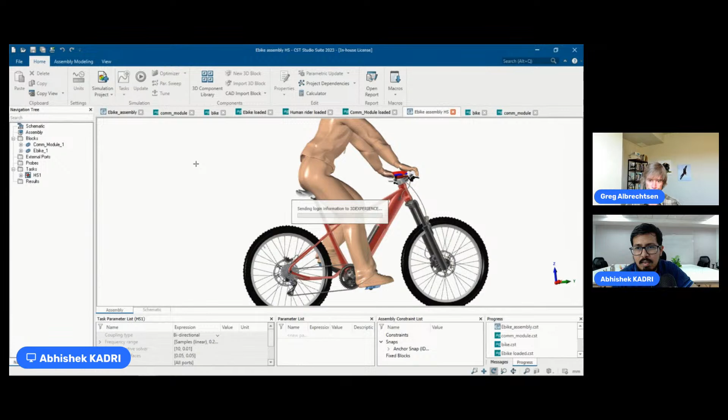Nice. Yeah, when you went to that other screen, it's very familiar. It almost looked like I thought you were switching over to your PowerPoint slide deck or something, but that's just like the layout looked very familiar like that. So that's pretty awesome that they're starting to integrate some visuals of the other tools that we've all been using for years, SolidWorks and Microsoft products, and just kind of bringing it all together and making things very, very familiar to us.

Yeah, and this is everybody, this is a live demo. We only do live demos here. We really try to not do any videos. So he's accessing some server. I don't even know where your server is.

The two of us are in a 12-hour time difference, and when I do demos, I access servers in Europe quite often, and I know you guys access servers over here quite often. So it's all very exciting, that's the beauty of the cloud, right? Anywhere, anytime, any place, for real. You can really be anywhere with a connection to the internet, whether you're hotspotting off your cell phone or whatever. It's just so incredible. Sorry.

Okay, keep going. Even this one is the European server, by the way. So the EMEA demo is actually located in Europe. All this data gets saved over there, centralized, and we all access the data on this particular server. It's not pretty bad actually, we can very quickly download data.

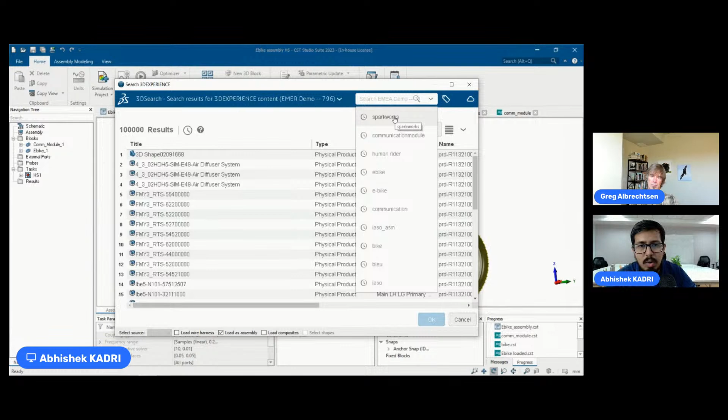So what I'm doing right now is searching for my data. I've entered a keyword called SparkWorks, but I see there are multiple files. I don't know which one of them is mine, because maybe a lot of people are working on the same files. So I go to this button called 6W tags.

W meaning what, where, who, all those kind of things. Here I want to see data that I have uploaded. Within this, I can see the persons, and here's my name, Abhishek. So I'll just click on this, and it will now show me the only file I've uploaded with the same name, SparkWorks e-bike.

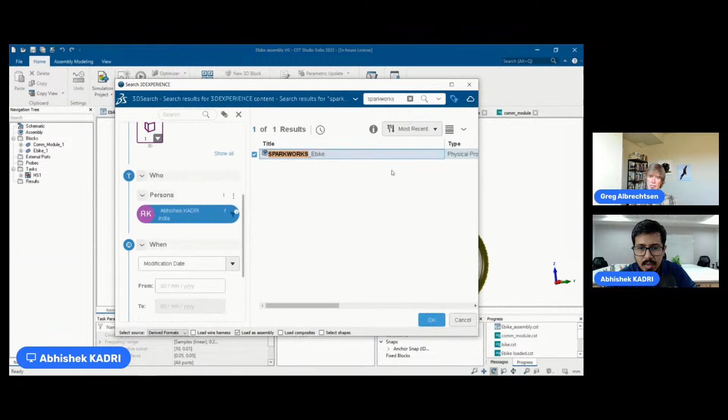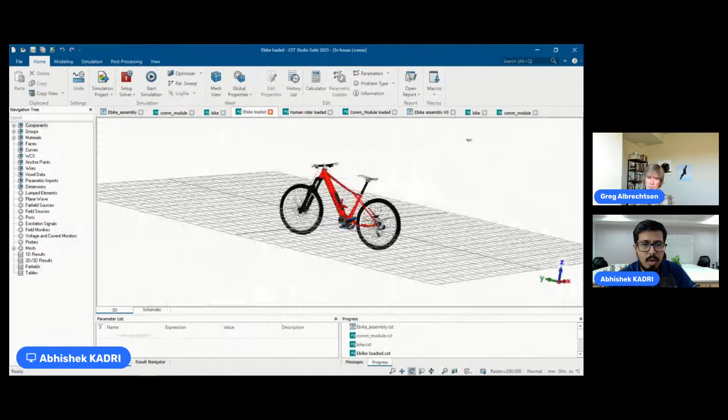So what I do is select this, close this, select it, and say okay. When I say okay, it will start loading the data onto my system. Since I've already done that, I'll just click cancel right now, and I'll show you the bike model that gets loaded. So this is how it looks. You launch it through the 3D experience, and then it would put it in CST here like this.

Exactly, yes, okay cool. Again, like the database, that's the thing that we just get. We're simulation people, but we get all this data management, not for free, but it just comes along with the package, and it's so great. I talked about it in one of my previous sessions, just data management nightmare that I am. So this is great, right?

Yeah, because even a lot of people may be working on the same data, you have the option to lock your file so that people who work on your file cannot actually modify it when you're working on it. You can keep it unlocked so that multiple people can work and then save different versions of the same file. So it's really fantastic.

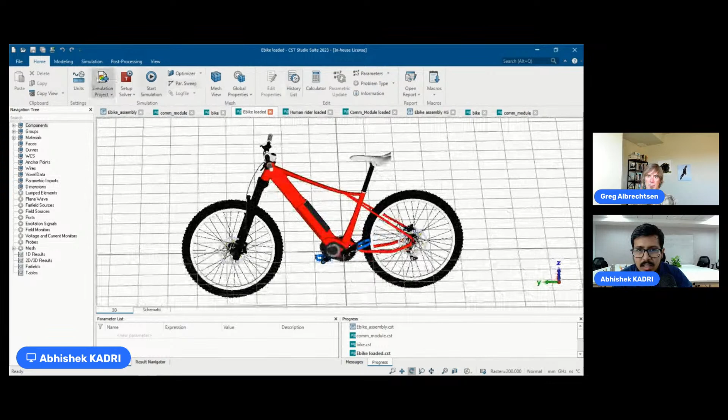So coming to this workflow now, you can see the e-bike loaded over here, and I'll give you a brief overview of how CST looks, what are these options that you see right now. I'm sure you're seeing many of these options, and you're kind of thinking what is really required for us. So I'll quickly show you.

This is called the navigation tree on the left hand side that you can see. This shows us all the different objects that are in the simulation area. So this 3D view that we see, we can call it the simulation area. Out of the first option called components, it is basically all the CAD that exists over here.

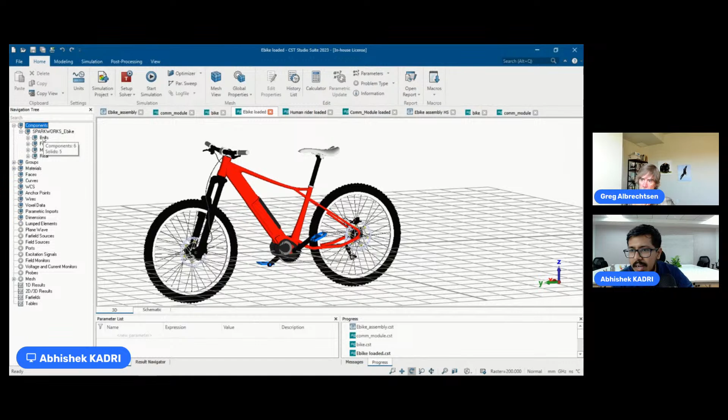So here you can see the SparkWorks bike, e-bike. This is a product, and within that there are multiple sub products, or parts, that come from SolidWorks. When you select each of these parts, only those parts get highlighted, and the remaining goes transparent, so it tells you basically how many parts are there. If I go within these, you will see several parts, like the brake shifter, the brake cable, so many of these things. I think all those who are familiar with the bike model already know this model nicely.

Apart from that, there are other folders like materials, groups. Currently, this e-bike has only materials that came from SolidWorks. These materials are not really of any use to us, because we need materials which have electromagnetic properties. Basically, a thing that is a metal needs to be defined as a metal in CST. But before doing that, let us first load all the different CAD that we want to work on.

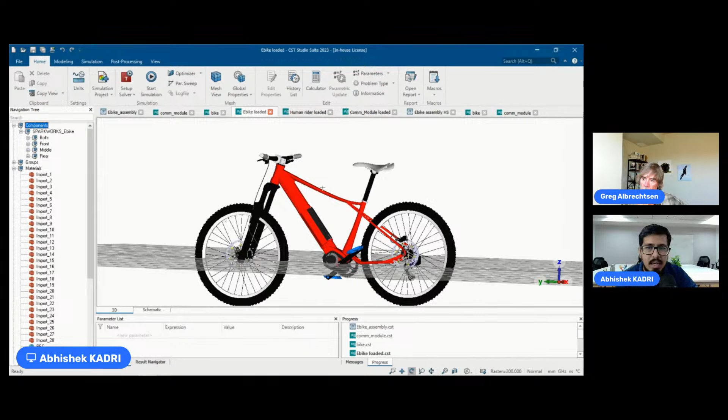So this is just the e-bike, but we need other things also. For example, since this entire demonstration is about antenna placement, we also need an antenna module that will get fixed on this e-bike, and we also need a human model. So let's go back to the same 3D experience logo, and again let's search for the human rider that will go on top of this bike.

Can you store those characteristics in the 3D Experience material property? Yes, you can. There is a way to store that. There is a material library in the 3D Experience platform where you can save all the properties that get defined in CST.

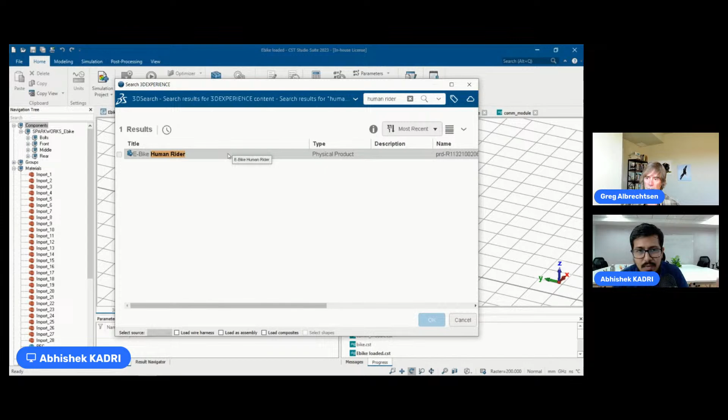So for this model, it actually came directly from SolidWorks. So we did not really go to the platform and define those material properties. We could have done that, but nevertheless we can do that in CST also.

So this is the human rider that I was talking to you about. It shows me only one file with the same name. Again, I click OK, and then it loads the human rider. I've already done that, so I'll just show you how it looks. This is how the human rider looks.

That looks like it's dancing or something. Sorry, that looks like it's dancing. I'm not sure if that's the rider or what.

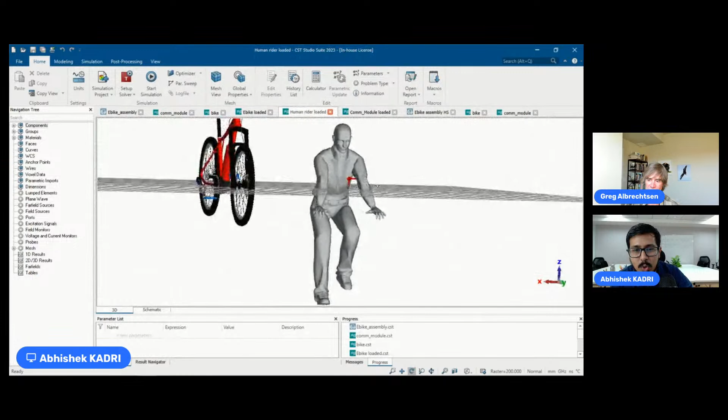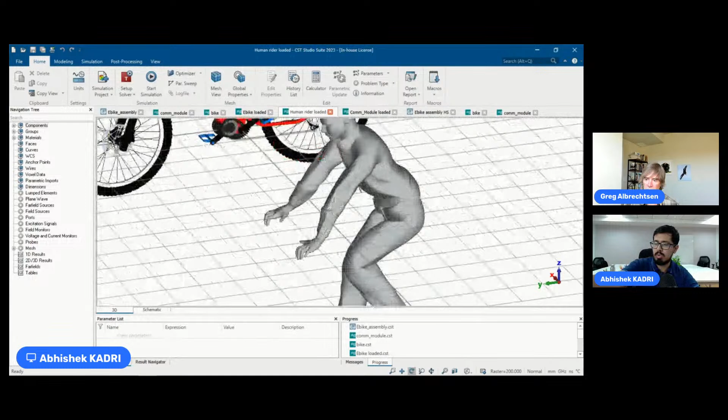Yeah, so that's actually we used a platform tool called Human Design, and that gives us a variety of human models, and you can actually pose it in the way you want to. For this demonstration, I have not actually covered those steps, but it's really a fantastic tool. You can pose it in any way. There are constraints, like your elbow would move only up to a particular angle, it won't go the other way around. So all those constraints are already fixed in that app. It's a wonderful tool.

Using this tool, I was able to pose this model and then download it. But as you can see, it's not placed on the bike. We want it to be exactly sitting on the bike. So very easily we can translate this model to the place where we want. I already have the XYZ coordinates of this human model.

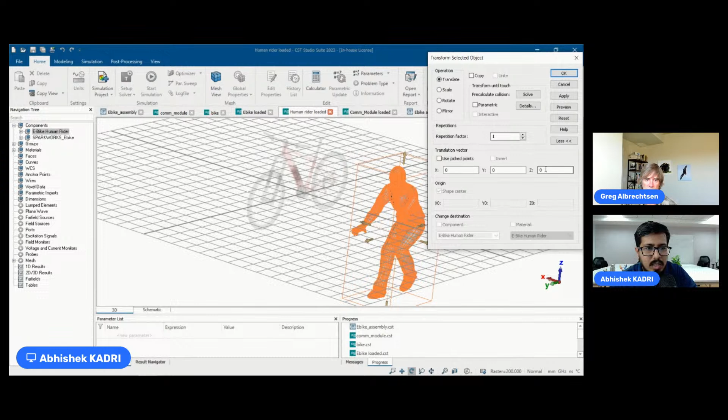So if I go to the navigation tree, I select the e-bike human rider, right click and click on transform. Transform will give me a variety of options whether I want to translate, scale, rotate, or mirror. Right now I just want to translate it, so I'll enter the XYZ coordinates over here. I can also just drag it this way, which does the job easily but won't be accurate. If I want it to be placed exactly on the seat, I need to enter those values. So I'll just quickly enter them.

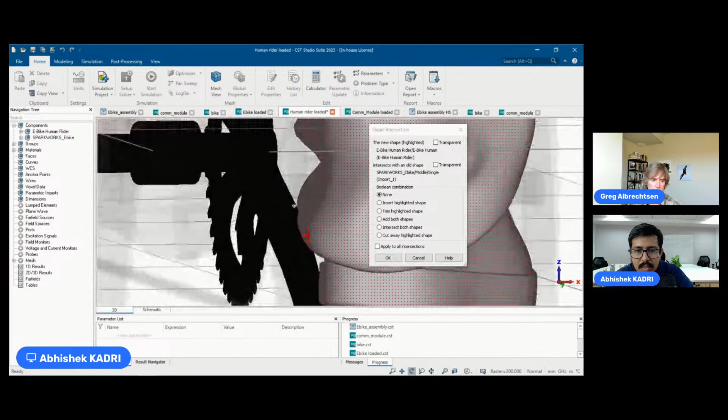So the cloth, that is the pant, is a little bit interfering with this part. I'm not sure what it's called. It's some part of the bike, but this is where the chain goes, right? This is where the chain goes of the bike.

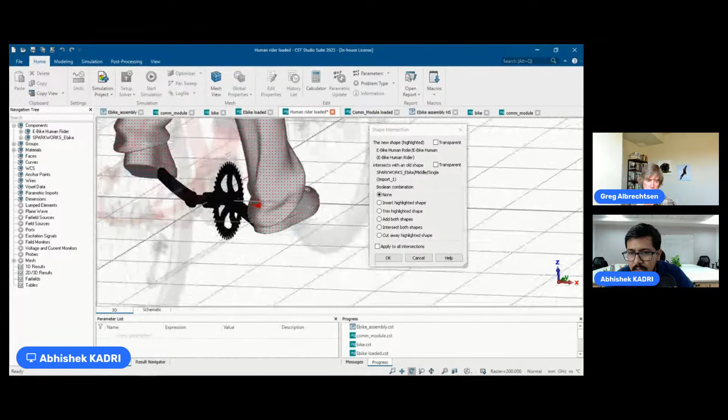Yeah. Since from the EMAG point of view, it doesn't matter. Even if there is a slight intersection, it doesn't matter. Maybe for structures or fluids workflows, it may matter. But from an EMAG point of view, it really doesn't matter because this one object is metal, the other object is basically human tissue. A slight intersection will do.

So what I'll do is I'll just select apply to all intersections and I'll say none. So nothing will happen. If I say something else like insert the highlighted shape or trim the highlighted shape, then accordingly that CAD will get modified. Since I don't want that, I'll just say none and OK. And now you can see the human placed exactly where it is supposed to be.

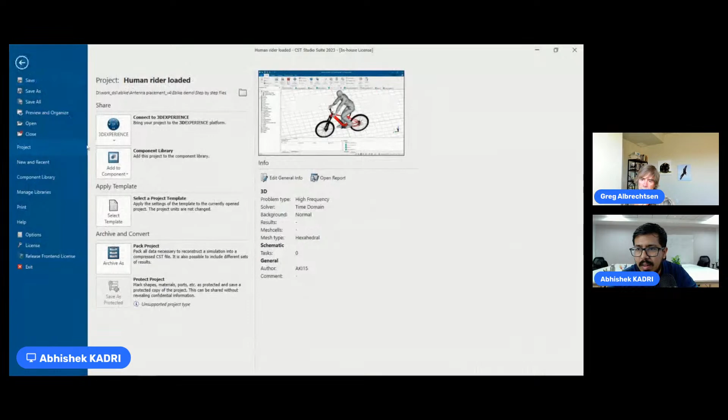So we have one part of CAD, that is 50% of our CAD definition, done. The other 50% is the communication model, the antenna module. So what I now do is create a new file. I go here, new and recent, and I click under 3D simulation on high frequency because we are all working on high frequency simulation, by the way. There's low frequency, there's high frequency in EMAG.

How do you define what is high and what is low? Yeah, that's my question. Thanks. Okay. I thought you would ask that. So high frequency is basically anything in terms of hundreds of megahertz. I'm sure you know this unit called hertz, right? Number of cycles per second. And megahertz is 10 raised to 6 hertz. So for example, most of our radios are like 98.7 megahertz, almost in the range of hundreds of megahertz.

Your GPS antenna works at 1500 megahertz. So it's definitely high frequency. Anything that is low frequency would be in the range of kilohertz, so just 10 raised to 3 hertz. Most applications like motors or some sensors which don't have anything to do with data transfer, but just electrical stuff, that will be low frequency stuff.

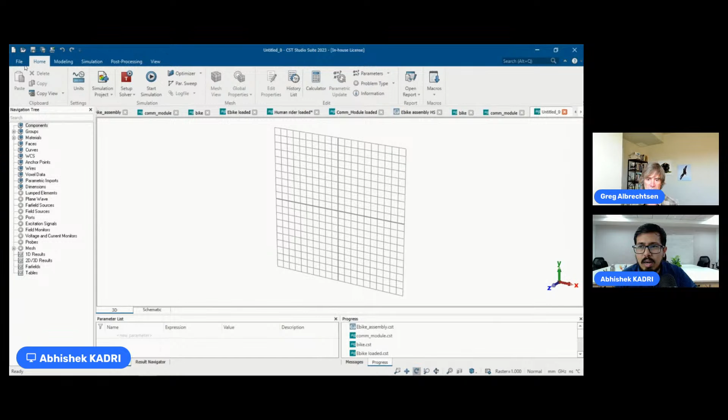So I now created a new high frequency simulation file. And what I do here is again, I go to the 3D Experience logo and I load another model, that is the communication module. This is again a file that comes from SolidWorks. Just like the bike, we had saved another file called the communication module, completely developed in SolidWorks, and that was saved to the platform.

So now I'm just looking for this file. I'm searching for the file on the platform. This sometimes takes a minute to load.

So while that's loading, we have a question from the audience. I know for structures, we have some examples that are accessible. What about the EMAG stuff? Obviously we're supplying the bike models, but does the software come with any tutorials or examples? Yeah. There are many courses on the EduSpace, the official tutorial site, where you can opt for these courses, and it gives you a very hands-on experience where you can download models, execute the simulations, and then verify your results with the results mentioned in the tutorials.

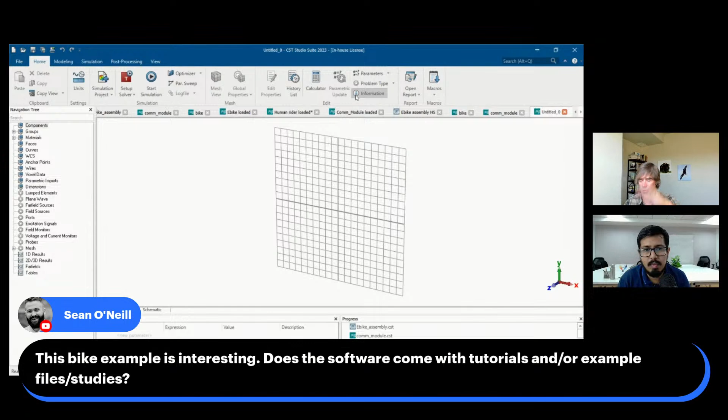Okay. Because I know SolidWorks comes with help and all sorts of awesome examples. Is that a similar setup then? Yes, definitely. From an EMAG point of view, there are several modules in CST. This is just the high frequency module that we are going through right now. There are multiple modules, even low frequency. There are sub modules, EMI, EMC. Each module has a curated list of examples. You can go through those examples, and at the end of the day, you'll be pretty confident working on EMAG workflows. Nice. I can guarantee that.

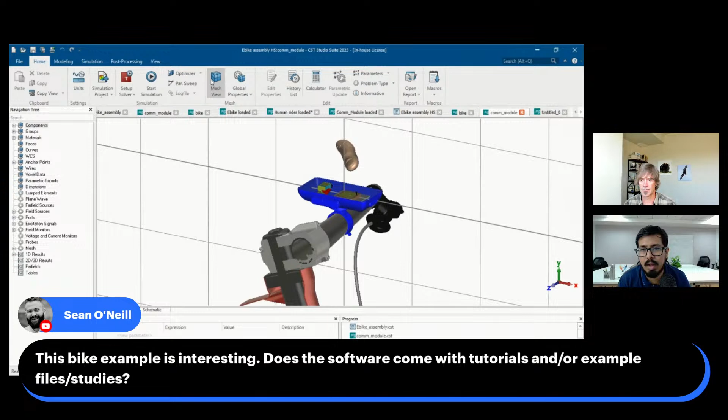So this is how the communication module looks. I was trying to load it from the platform, but I think I need to reload CST. But luckily, I have loaded the communication module already in CST.

This is how it looks. I've hidden the top screen. This is basically one of those devices which have the display as well as the antennas. It's like a phone basically that goes on your handlebar. And what you can see over here is there are two antennas within it.

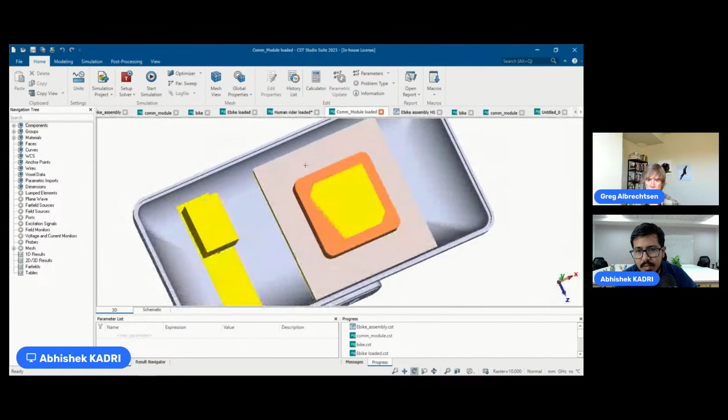So this antenna that you can see, the bigger one, is the GPS antenna. This is the main antenna. And the second one over here is the Bluetooth antenna. So this device basically has two antennas. So what we do now is that we have all of our CAD already imported from SolidWorks into CST. The next step is material definition.

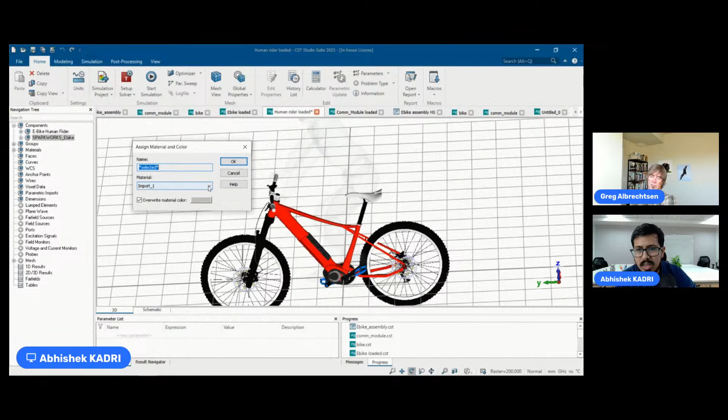So let's first go to the e-bike with the human, and I'll quickly show you how to define materials. I right click on this e-bike over here in the navigation tree, and I say assign material and color. And since we know that the bike is mostly metal, mostly steel, I'll say load from material library. This will show me the list of materials that are already in CST.

They are inbuilt. There's a huge list of materials like air, aluminum, all kinds of materials, fully defined, even the thermal properties, the EM properties are completely defined. And that comes with CST? Sorry? That comes with CST? Yes, that comes with CST, and there is an additional module with an extensive list of more materials. You can also download that from the DS website.

So yes, this is the material that we need. It's called steel. I'll just load this material and then I'll say overwrite material color, and I say okay. What this does is that it does not take the color of the material steel, but keeps its original color. If I had not checked that box, everything would turn fully gray, which is very bad for visualization. So right now the entire bike has become steel.

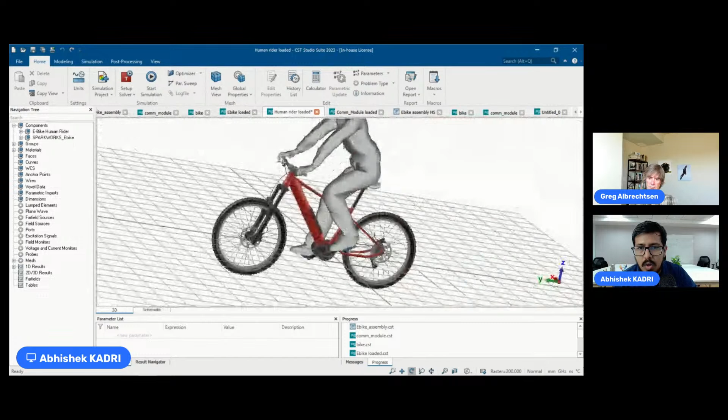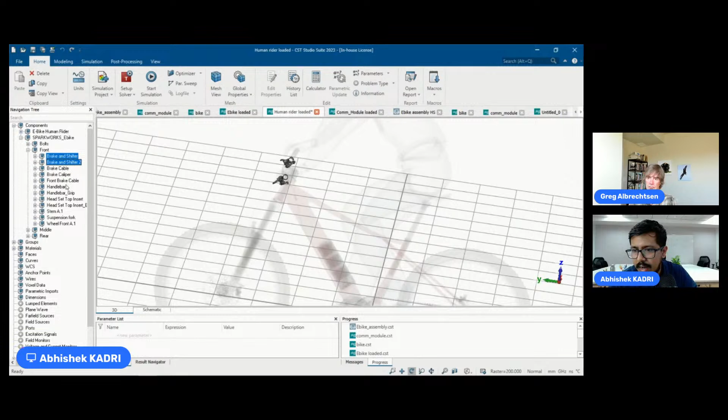But we all know that there are some parts that are not steel. For example, the tires, the brake handles, the grip of the handlebar. So what we can do is go to the navigation tree, look for those parts, and right click on them. We can select by keeping control pressed. It will keep highlighting those parts, and then we right click and assign material. Just a second, I'll also select the tires.

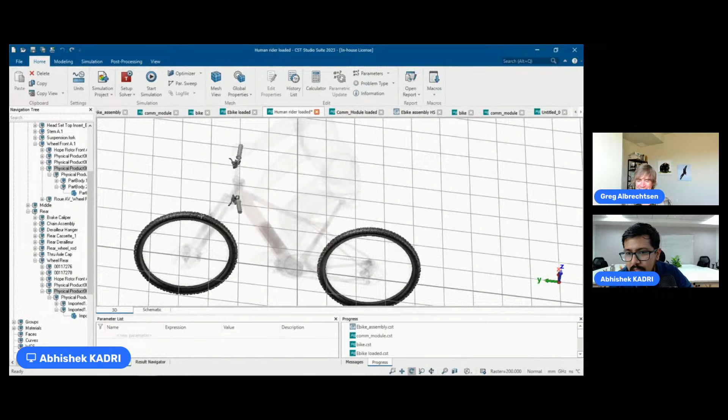I think there's some other software that could use this sort of selection visualization. That's awesome. Things like wireframe outlines. That's great. I love it. Yeah, right now I was not able to recollect which subfolder those parts are in. So I just clicked on it, and it showed me where exactly it is. That's awesome.

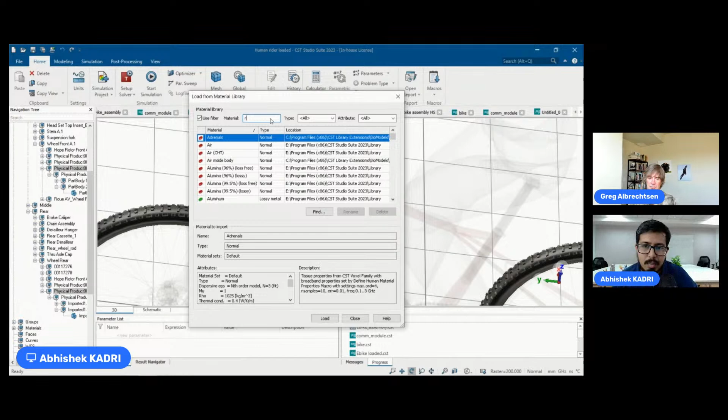So I just selected over here, assign material, and again I go back to the list, and this time I look for a different material, which is rubber. We can go in a lot of detail in this, but for this demonstration, I'm just selecting two materials, steel and rubber. Cool. So I search for it, I see rubber over here. I load the material and I say okay. So this material also has been defined now.

Similarly, for the human being we have a separate material. It's called muscle tissue fat average. But before that, this model actually has a lot of parts. When I clicked on this module, as you can see, there are multiple parts here. Whenever I move my cursor, it highlights the selected part in red without even clicking. Whoa. And what I came to know is that it's not really required that so many parts be there.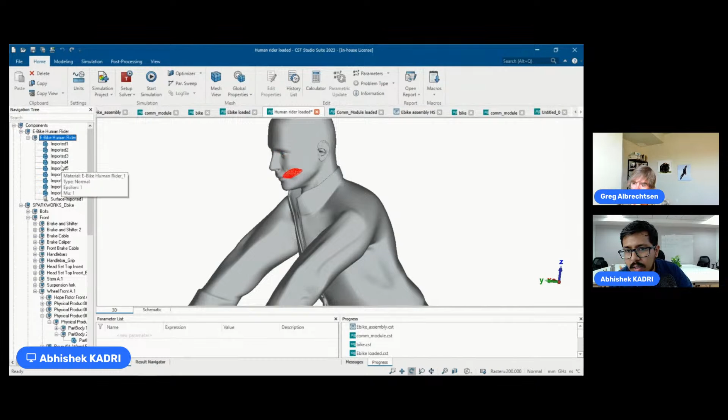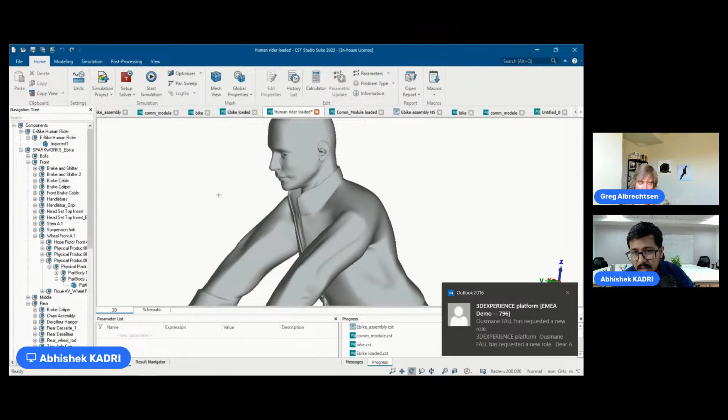This is like the eyeball, the jaws, the tongue. I don't really want that much detail. So I'll just keep the base module of the human being and select and delete the remaining things. So those are probably in there for somebody doing a cell phone or a Bluetooth headset, I guess, right? Yeah, if you want detailed analysis of how it affects the teeth, how it affects the eyes, you can see that too. So that's a very good feature.

So again, I just assign the material. I go back to the material library and I search for my material.

That's muscle. You'll see all kinds of materials over here. You'll see blood, you will see tissue, everything. But right now, since everything is just one model, I'll just take a muscle fat average, and I want the color of that material. So now, see, the material has been defined. So we are done for the e-bike.

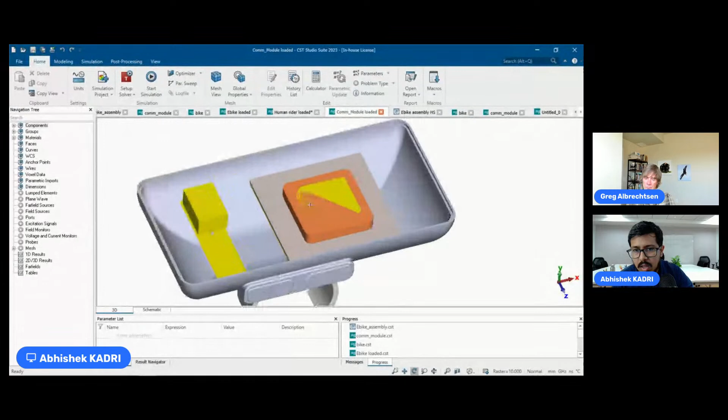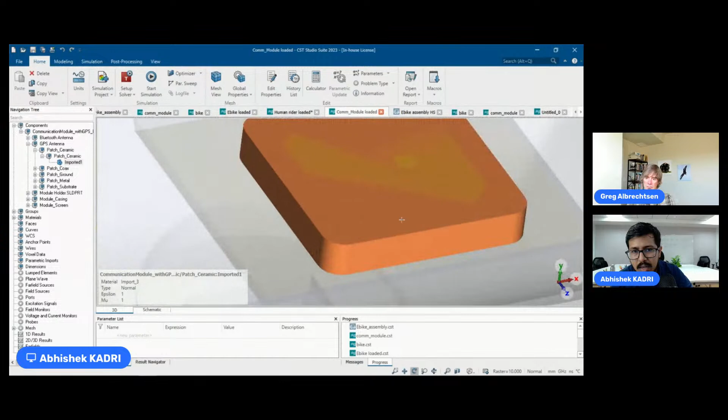Similarly, we can also define materials for the communication module. As you know, some parts of an antenna are metallic, whereas some parts are dielectric. So we need to define exactly which parts are what. For example, I'll not show all the materials, but I'll show you just one of these things. So for example, this is called the dielectric. It's like an insulation on which there is a patch.

So the patch does the job of radiating electromagnetic waves out of it, but it needs to be placed on something that is an insulation, and below that you'll see another metallic object called the ground plane. So, as you know, like basic electrics, there need to be two potentials, plus and minus. Similarly, we have the radiating element and the ground plane. So between these two things, we have the electric field that gets converted into an electromagnetic field and it starts radiating.

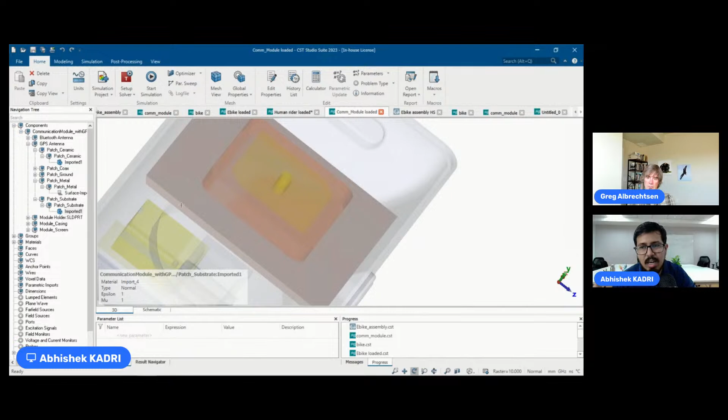So again, we assign a material. This time, my material is not in the library. So what I can do is I can just create a new material and I can give it my own name, just as I want to. So I call it ceramic, and the electromagnetic feature over here is called epsilon. Epsilon is basically relative permittivity. This is something that defines how your electric field will be stored within that material.

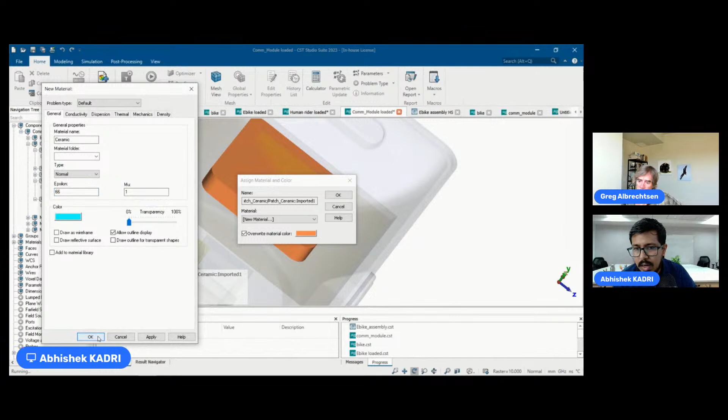Yeah. So I know that for ceramic, the epsilon value is 66. I got it from a data sheet. Okay, so I just click OK, and this material gets defined. Likewise, I can even define other materials. And once I'm done, I can even change the color if I want to.

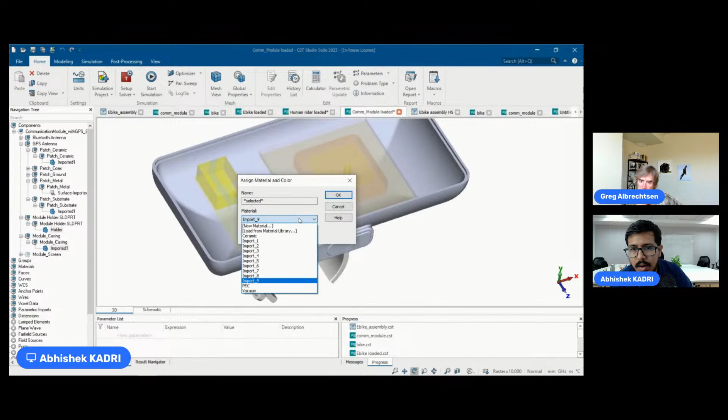If I think that this is a very dull color, gray, I can go here and select blue, and maybe I can call this material plastic, and the epsilon value for plastic is 1.2. So I define this, and this becomes blue. So that's how easy it is to change the material, the electromagnetic properties, as well as the visualization colors in CST.

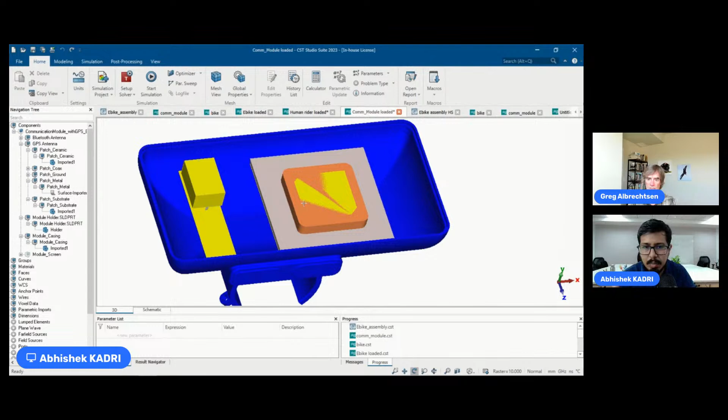Once we have defined all the materials, the next step is port definition. So we wish to create an area within this antenna where the excitation will be occurring. So basically, if it was a physical antenna, where do you connect the wires to the antenna so that it gets charged up and it starts radiating? For that, there is a tab called simulation tab. When you click on it, you will see an option called a discrete port, a waveguide port. There are different kinds of ports. So what we'll do is we'll create a discrete port.

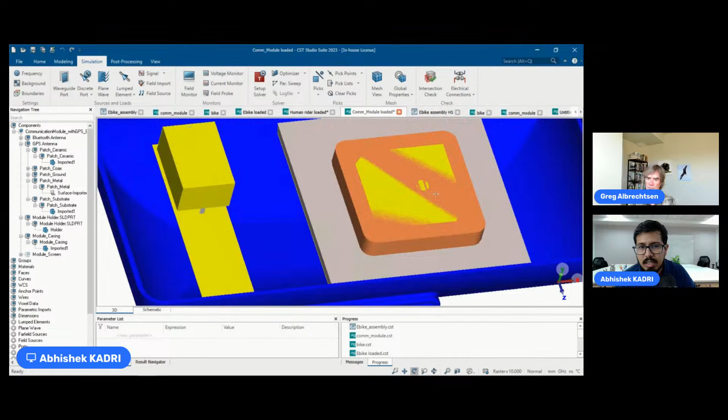So for the object where the port gets created, if I look in this tree, I need to look for the coax. Coax is the coaxial connector. That is where we want to define it. So it looks something like this. Generally, it has multiple conductors and a dielectric in between, but this is a simplified version of the coax. So what we do is we select the edge. For that, I'll hit E. It gives me an option to select the edge.

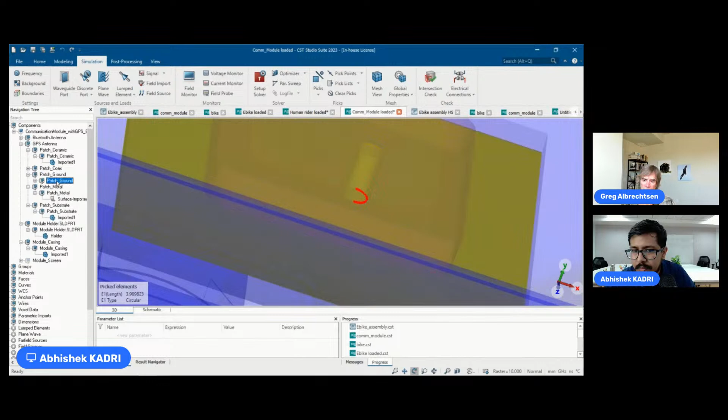Okay, and then I can select the ground plane. So if I go to ground, this is the ground plane, and I select, let's say, F, and I click on discrete port. So I'm basically selecting two areas where the discrete port will be created between those areas. So this is how the port looks.

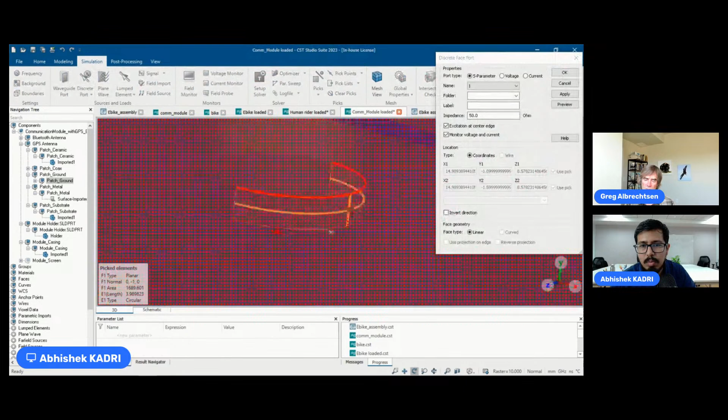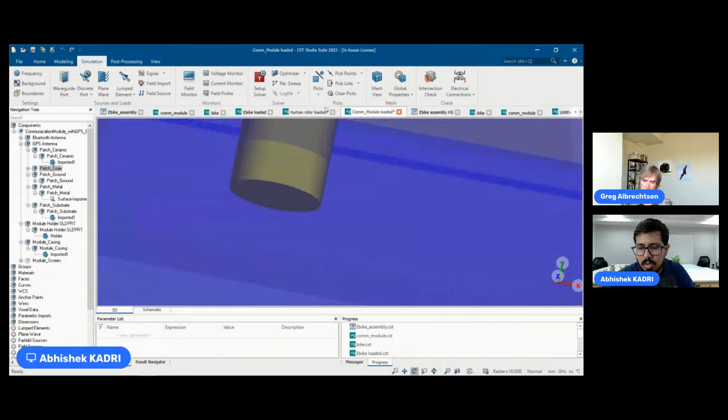Now, ideally, I would want the port to be completely circular around it, because the electric field will obviously be flowing through the entire port, not just through half of the conductor. Right. But since SolidWorks, while importing the data, divided this cylinder into two parts, that is the reason when I select the edge, it selected only half of the edge. So either I could fuse those two halves in SolidWorks, or I could simply select the coax once again and create another cylinder over here.

So if I say modeling, pick circle center, I select the center, and then I create a cylinder over here. So there are modeling capabilities in CST also. You don't need to go back to SolidWorks for very, very small things. You can do those things in CST also. That's good to know.

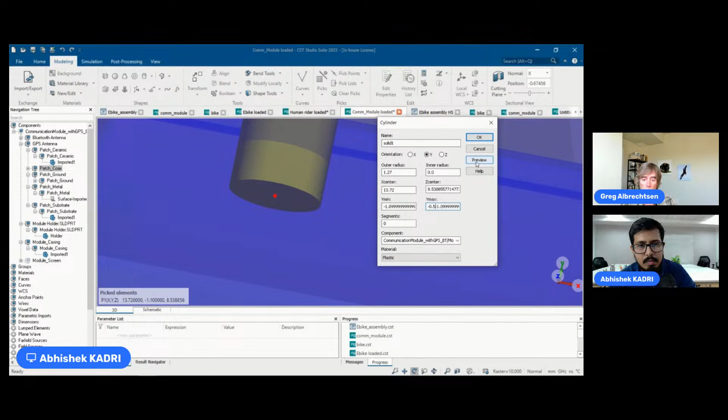I know this is not SolidWorks, obviously, this is CST. It may have originally been one surface in SolidWorks. So sometimes when you move to even 3DEXPERIENCE or this, you have to have some way to make that back into one, because it just automatically splits it in the translation.

So that's cool to see that you have this capability. I've been asking too many questions, so I've really kind of pinned back my questions. We have about 10 minutes or so left, so we'll keep running through here.

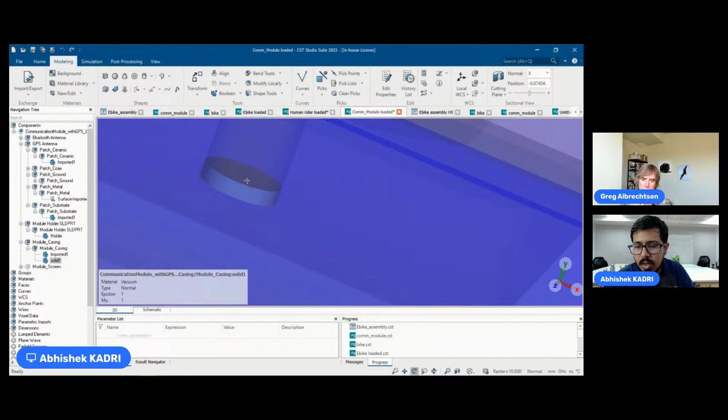Okay, Abhishek, let's go. Yeah. So now that I've created this cylinder, I can select the two faces of this and the two edges of this, one top edge, one bottom edge. So now I have two complete edges. And now I click on discrete port, and the entire port, as you can see, is throughout the circumference. This is what I was trying to achieve.

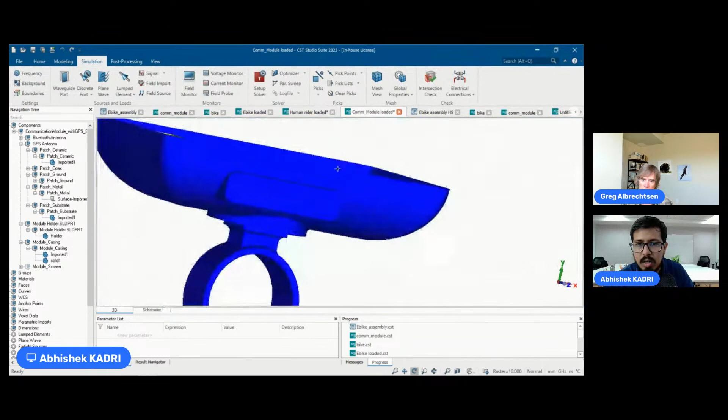Cool. So now that I've created the port, similarly we can create another port, but I've already done that. So I'll quickly show you the next step, that is creating the assembly project. We have created these two CST files. One is the e-bike with the human. The second one is the communication module. And now the next step is to place this on the e-bike. So we need to create those points where it's going to be placed.

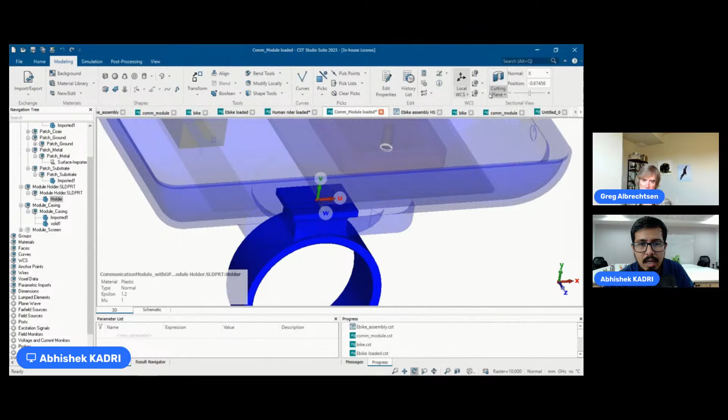So I select this particular point and I create an anchor point. When I click on this particular option, I say align WCS. The WCS is basically the working coordinate system. And I say store it as an anchor point. The same thing I do even over here.

I can either select a point over here where I want the communication module to be placed, or I can even use the XYZ coordinates and directly define the coordinates through that option. So I need to pick points from coordinates, and here I define those points, and then I do the same thing. I create an anchor point. So both of these files have the anchor points.

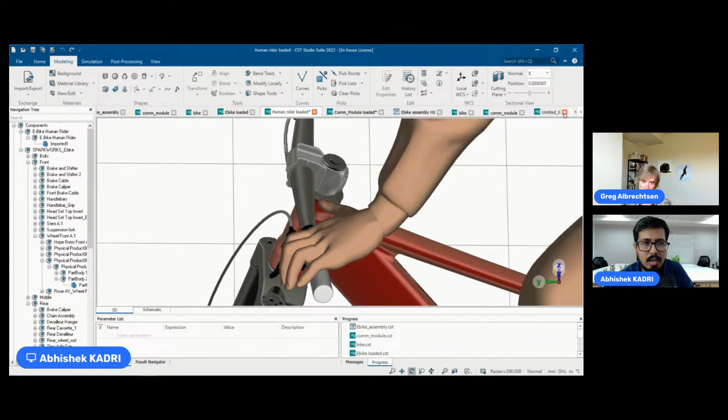Then what we do is that we create a new file. We go to new, and this time we say an assembly project. So we want to assemble two different blocks together. So now we select those blocks. So here you say import 3D block. Both of these files are now locally saved. Even though we got it from the platform, we did save it locally.

So let's see those files. The first one is the e-bike with the human. So I click open, and that gets loaded in this new project. And the next block that I import is the communication module. So this also gets loaded over here. You can see this yellowish black spot. That's basically the anchor point that we just created. These are the areas where we want the two blocks to get connected.

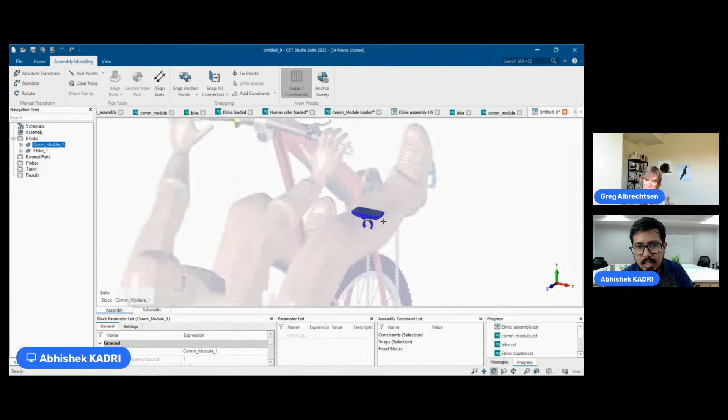So I go to assembly modeling, I select the communication module, and I see it's somewhere completely different. I say snap anchor points so that I can connect these anchor points. So I select this one, and then I select this one, and the module quickly just snaps back over here.

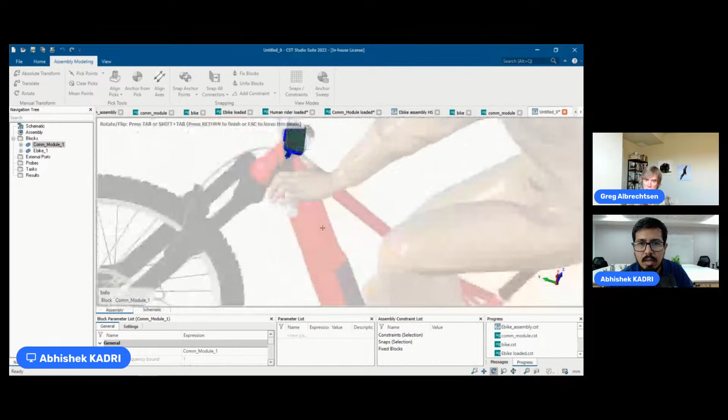And now I can change the orientation by just clicking tab. It will keep on rotating. And yeah, this is the orientation that I want. So I click enter. So now this gets fixed over here. So we have the antenna placed on the e-bike. The next step is to define the simulation.

I could define everything in just one simulation. I don't need to create a separate block for the e-bike and a separate block for the communication module. But what would happen is that the mesh size would be extremely large, like in billions of mesh cells, because 1.5 gigahertz is a very high frequency. So solving billions of mesh cells will take a long time. But if you have GPUs, then you can even solve them within a day or two. But we want to solve this very quickly.

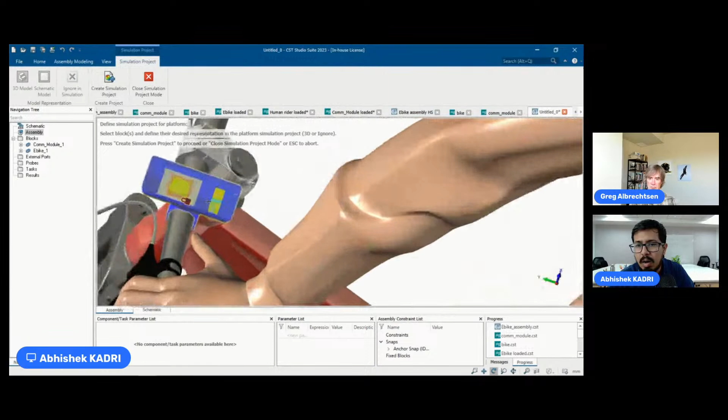What we did is that we created two different blocks, and now we create a simulation project called the hybrid solver task. What this does is that it solves very finely only the communication module. It records the waves that come out of it, and it only takes those waves and excites the entire e-bike, as opposed to solving the entire e-bike. It is only solving the small portion.

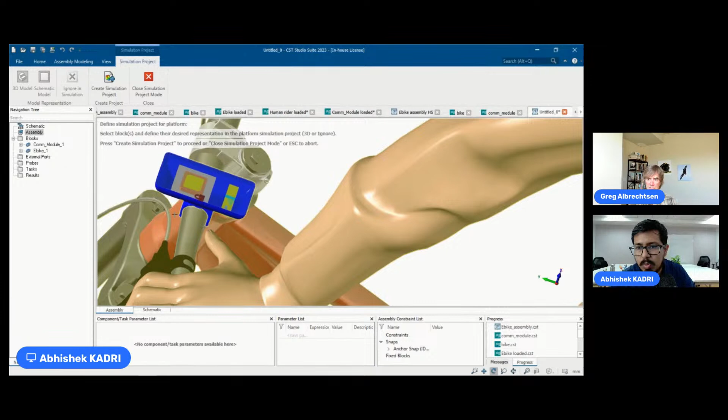So I'll show you how that looks. It's now asking me to define the simulation project for platform. So platform is basically the larger structure that we want to select.

So it's the e-bike. We select the e-bike, we click 3D model, and say create simulation project. Here we define the solver. We have a list of solvers we can select: integral, transient, frequency domain, TLM (transmission line matrix), and asymptotic. Asymptotic is the fastest solver because it uses the shooting and bouncing technique of simulation. We select this and click OK.

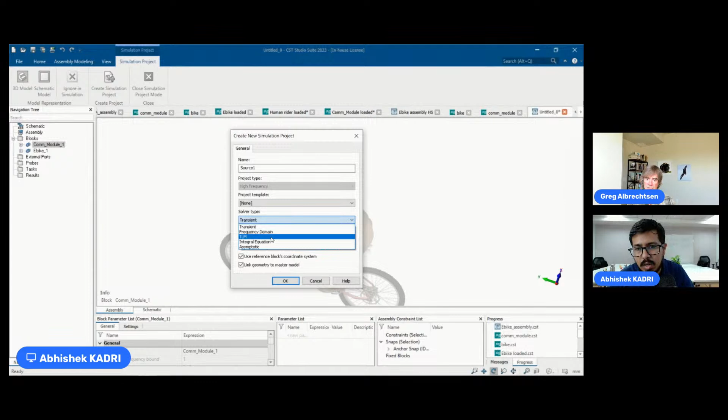Now it asks us to select the source. So I select the source. Again, I click on 3D model because I want an actual model. Then I click on create simulation project and select the solver. This time I select the TLM solver. TLM solver is a very good solver that very finely solves your simulation. It uses basically Maxwell's equations. All of these EMAG tools use Maxwell's equations to actually solve at each of those points.

So we select that, and once we have defined the source and the platform, it still asks us, do you have another source? In our case, we have only one source, that is the communication module. So we then click OK.

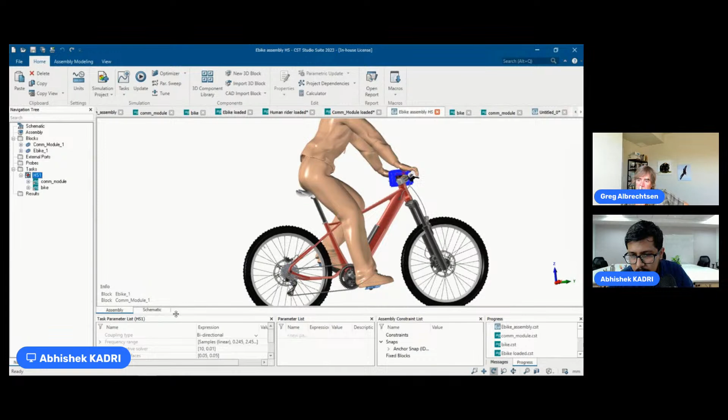As soon as we do that, we see this hybrid solver task get created. When we click on this, it shows us the task parameter list, and it asks us things like what are the different frequency points or frequency samples. Since we have only two antennas, the GPS antenna and the Bluetooth antenna, we enter only those particular values. I enter the frequency for GPS, that's 1.575 gigahertz, whereas for the Bluetooth antenna it's 2.45 gigahertz, the standard band in which all Bluetooths transmit and receive. The number of frequency samples is only two, so I want to see only the fields at these two frequencies.

Once I'm done with that, this is a bi-directional solver. What it does is excite this particular box that you see here. The smaller box gets excited and it records the field due to this box. Then it goes to the e-bike simulation model. It excites the entire field with those particular fields recorded from the small box. Then whatever reflections come from the bike—let's say the field hits this metal object and reflects back some field towards the communication module—it records that too.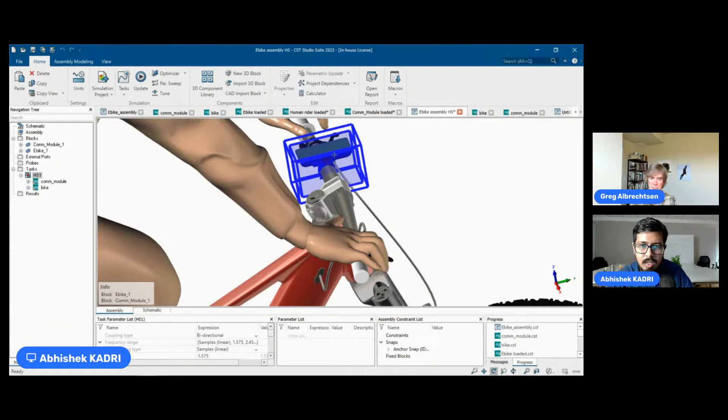So now this goes back and forth multiple times, and it does an iterative solve. It solves multiple times, sees the reflections because of this, adds those reflections and simulates the source again. It does that until between two iterations there is an error of 1% or less. Then it stops solving, and that's when we get the right results.

So what I need to do is just right click and say update, and once I click that, it will take about 1 or 2 hours depending on your configuration. Then you will see the results. So how do you see the results? The most important thing is the 1D results, the S parameters. S parameters are basically the return loss at that particular frequency.

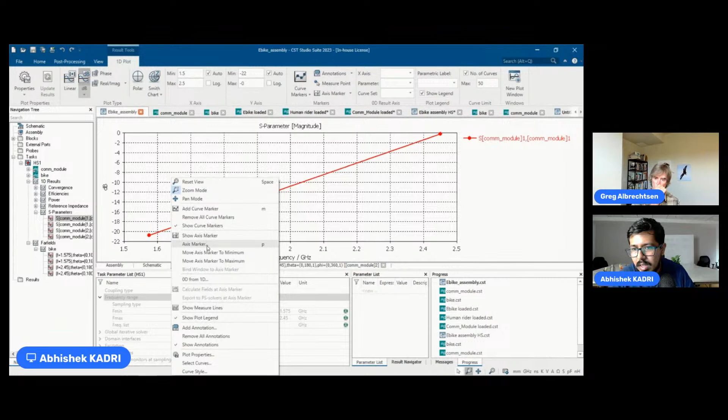Firstly, we'll see the return loss at the GPS frequency. I'll just move this axis marker, which will show me the return loss at my GPS frequency. It's about minus 21 dB, which is pretty good. We want a return loss of less than minus 10 dB, and what we're getting is minus 21 dB. So that's pretty good—there's no field coming back from those cables you connect to your antenna. Most of it is going to the antenna and then getting radiated. That's exactly what we want.

Similarly, at the Bluetooth frequency, the return loss is about minus 22 dB, which is again good—it's minus 21.96 as mentioned here. So both of our antennas have very little return loss. That's the first indicator that our antennas are functioning properly.

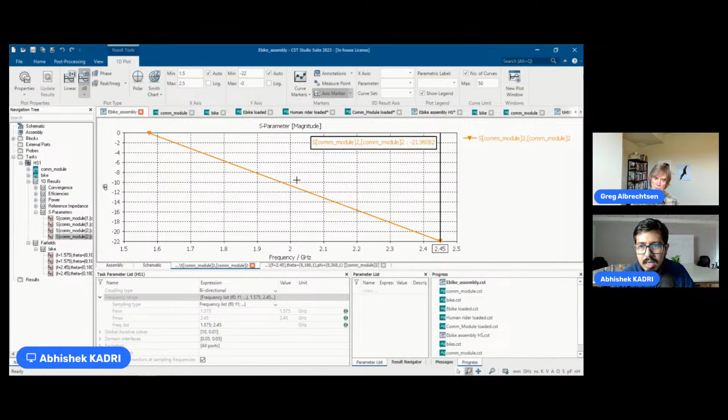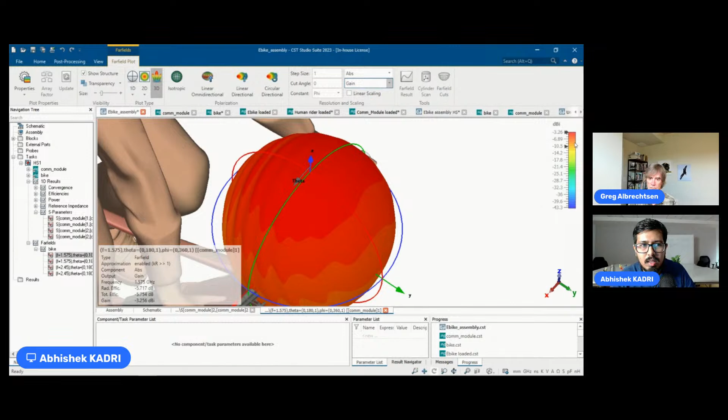I can change this directivity to gain, and it will show me the value. Okay, and this is how the gain looks.

Likewise, I can even see the gain for the second antenna, that is the Bluetooth antenna. Over here, you can see the pattern is a little bit different. It's not circular, it's not spherical.

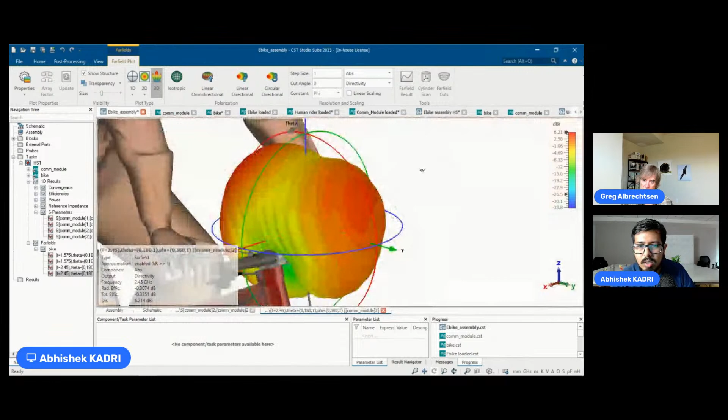But that's okay. The GPS antenna, as you know, communicates with the satellite, which is tens of thousands of kilometers up in the sky.

The Bluetooth antenna, on the other hand, will probably just communicate with a phone that is in your pocket. It's quite close. So even if the radiation pattern is not that good, it's okay because the phone is quite close, so there will be multiple reflections.

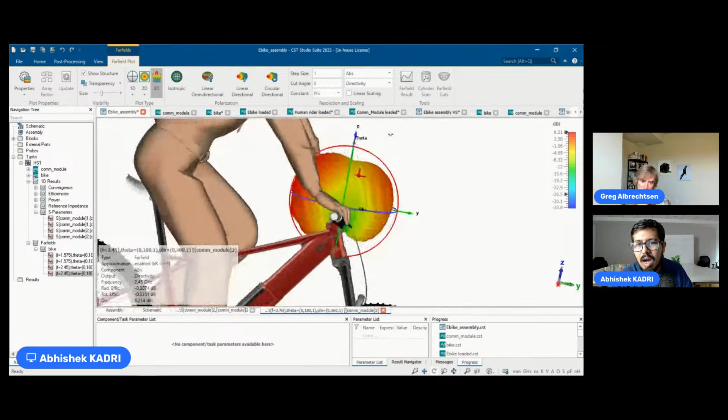The last but not least, there is another way of seeing this, which is the E field. So if you look at the E field, just a second.

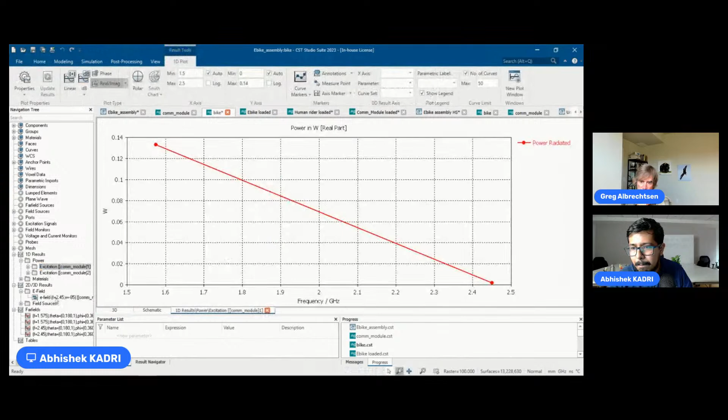I know we're right over just a few minutes, but this is pretty good stuff. So I'm gonna let you keep going here. But for those that are subscribed, don't leave, we're right here at the end, the good stuff. So we'll leave just a couple minutes for some questions. But yeah, this is fantastic. So keep going, we'll go for like another couple minutes here. Yeah, show us this. Yeah, this is almost done.

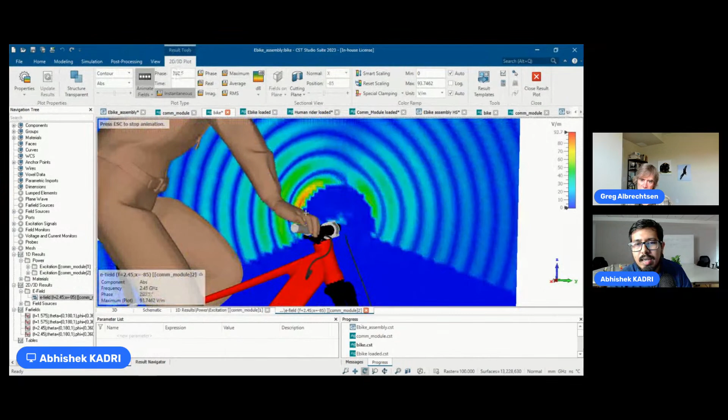So this is the last result. This is the result that tells us how the electric field is radiating. As we can see, it animates the entire field according to phase, and at this particular cut section, we are able to see from this antenna how the radiation occurs.

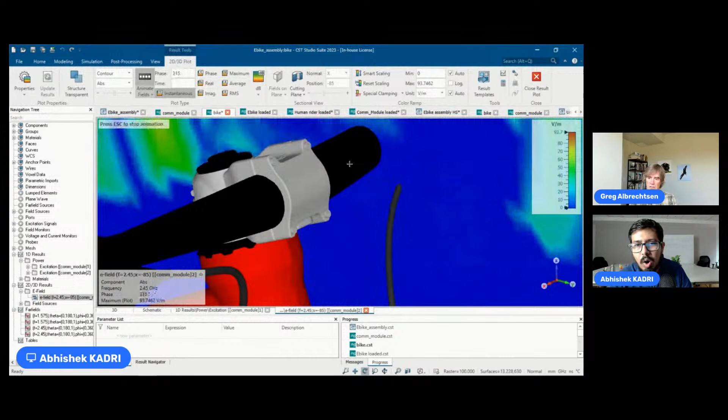So we can see that in the lower portion, there's almost no radiation. That's probably because there's a lot of metal. For example, this handlebar is metal, so it's blocking all the radiation in the lower part.

Whereas in the top section, the communication module itself is made of plastic, and plastic does not block any radiation. It may change the amount with which it is radiating, but not much as metal.

So this is actually a very good way of seeing whether our antenna's radiation is being blocked in a particular direction or not. In our case, it's fine in all ways - the return loss, the antenna gain, and the E field - all three ways we are seeing that the antenna is performing well.

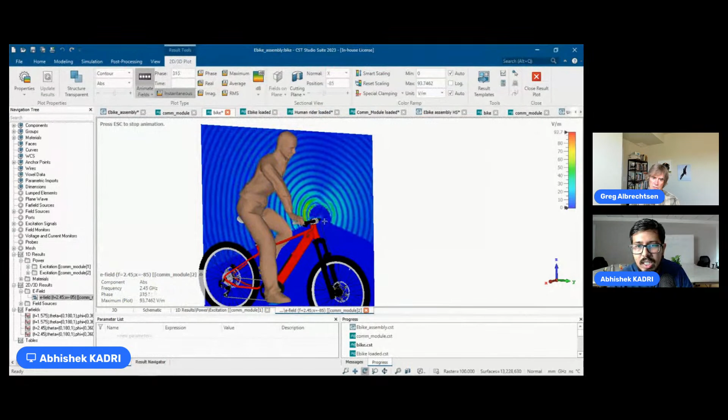If it was not performing well, then we would have to do some design change. We would have to change the position of the antenna, the orientation of the antenna, a lot of things that we could do. Those are very much easily possible in SolidWorks.

So yeah, this is it from me. I guess I can take any questions if there are any questions.